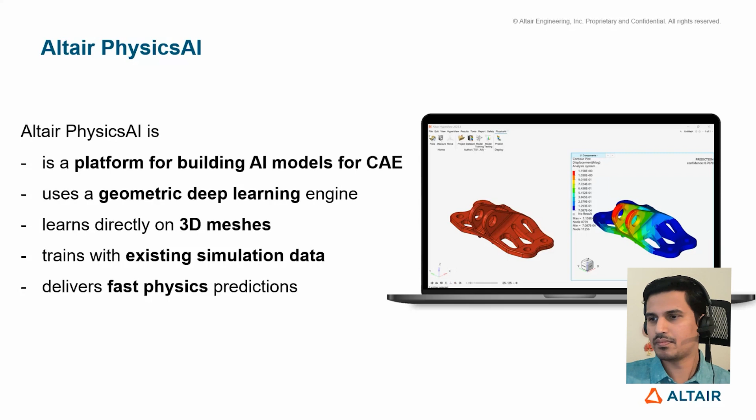So since we use deep learning, we can apply this method to different domains. We are not only restricted to structural CFD, but we can cover a wide variety of different applications, right from electromagnetics to aerospace, healthcare, and you name it.

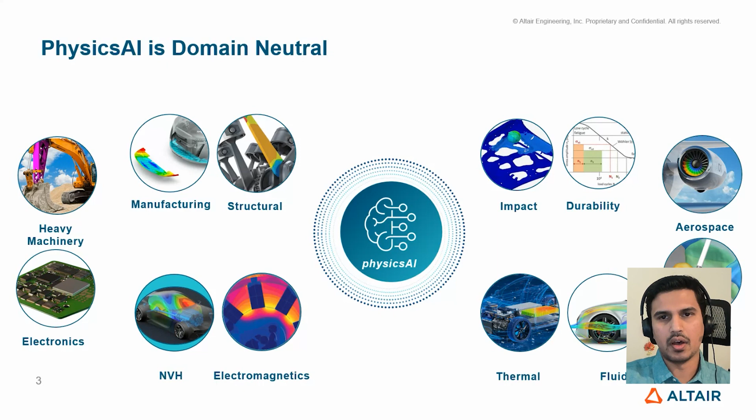So how does physics AI differ from traditional machine learning? Surrogate models, which usually are regression models, usually have a set of parameters, that means numbers going in, and we fit some sort of regression equation in there, and a KPI or a key performance indicator value, which could be a single number, comes out.

Now, if you look at the way this is constructed, these parameters need to be explicitly created, and because they are defined for a fixed set, there are a lot of restrictions in terms of the variety of inputs that it can adjust. For example, if there are additional parameters, you can't combine old data with the new data and create a combined regression model. You would have to rerun and create an entirely new surrogate model.

Also, the output that is coming out is usually a single value, or in some cases, a vector or a curve. Contrast that with physics AI. In physics AI, there's no need for explicit parameterization. For example, if you look at different geometries where the variation is very organic, you can't necessarily put parameters on them. But physics AI, with its geometric deep learning engine, is able to accommodate that variety, which traditional surrogate models can't.

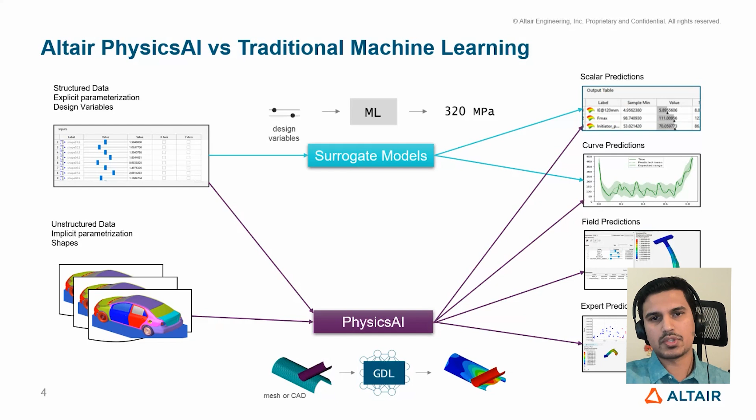And we can even train physics AI to predict some custom outputs, such as the failure modes, whether it's buckling or some other kind of deformation pattern. So really, physics AI can work with a larger subset of the input and output types.

So I spoke about the geometric deep learning engine, but what is it that Physics AI uses to process this variation? So in terms of geometry, we're looking at the coordinates for the points that form that geometry. We are looking at the connectivity, and we also have certain optional inputs such as part labels, which come in. For example, if you want to differentiate between different parts in a certain finite element model, you could have a bracket and a pin, and you could differentiate that, or maybe rigids and deforming geometry.

Additionally, to input certain parametric inputs, we have a method called custom inputs. Now, through this mechanism, we can put in features like thicknesses, materials, or it could be any other useful input, such as maybe an inlet velocity or an applied force.

And on the right hand side, this data is processed and spit out in the form of nodal or elemental results to create full 3D representations of fields. And we can even predict certain custom what we call vectors, and those basically represent the scalar values, the KPI and the curve values. So that's a brief introduction to Physics AI. Now let's see Physics AI in action.

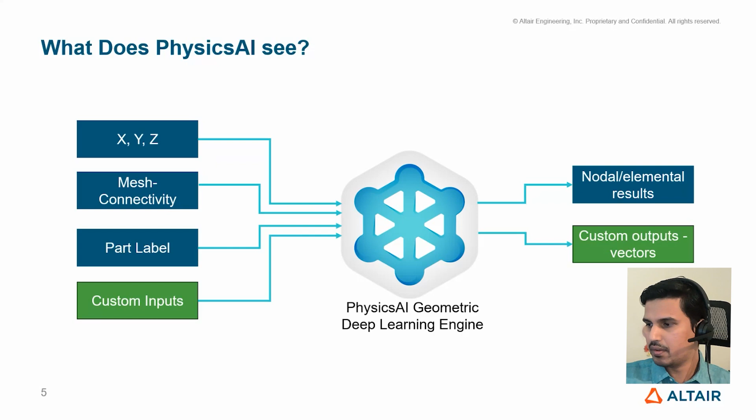So to demo that, I'm going to use HyperMesh, which is our pre and post processing utility, and also our model visualization tool. Physics AI is embedded inside of HyperMesh, and I'll talk about how well these two technologies complement each other to create an integrated tool. So let's say a designer has created a new design, and they have created a CAD model. So I'm going to drag and drop that CAD model in here.

All right. So if you look at how a traditional workflow proceeds, the designer creates a CAD model and then hands it over to the CAE team. Now the CAE team has sort of a manual and labor-intensive task of taking this model, meshing it up, applying boundary conditions, loads, and then solving it either using a CFD solver, because in this case we are going to evaluate the drag coefficient, or if it's a structural problem, then a finite element solver.

But because these models are huge, we are talking about hours or days of processing time before we can actually evaluate this design. And obviously, there's not going to be a single design evaluation. So you can imagine how the required time adds up. Now, with Physics AI, we can enable an alternative workflow.

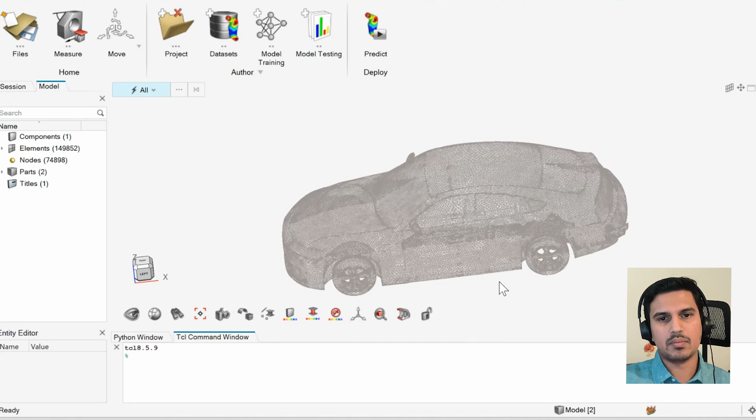So that model doesn't even have to be located on the designer's PC. It could very well be on the cloud. So let me show you how that would work. For example, in this case, this is Altair One, which is our cloud platform for sharing files and deploying Altair applications. As you can see, there is a folder here called Physics AI Models, inside which pre-trained Physics AI models have been uploaded. So think of it as a CAE team uploading them to the cloud and then sharing it with the designer.

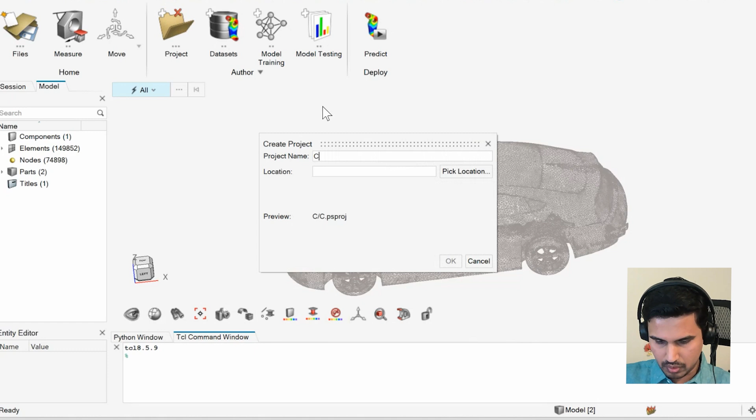So in order for me to make a prediction, I need to first create a project. So let me go ahead. And by the way, this is what we call the Physics AI ribbon. I'll talk more about it, but for now, let me just walk you through the demo. So I'm going to call it car prediction. And then I need to specify a location where this should be saved. So I'm going to select this folder and hit OK. Okay, you can see that the project name is reflected right next to the author.

Now, I'm going to import that model, which is available on the cloud. So I'm going to model training and then importing a model. And right here, you'll see the integration with Altair One. So I'm going to click on that and hit fetch. So we have two-factor authentication, so bear with me for 30 seconds while this loads up. Okay, so now you can see the list of all the models that are shared with me or available to me on the cloud.

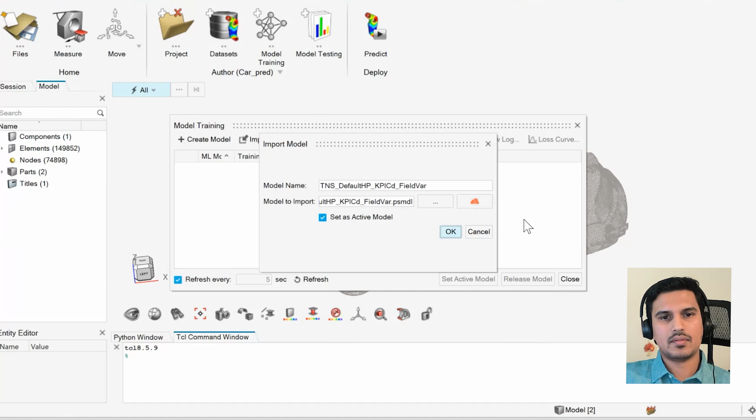I'm going to select the last one and just set it as active. So that model will be downloaded and we will activate it. Okay, it has been set to active. And I have the CAD model, I have the project, and I have the Physics AI pre-trained model loaded. All that remains to be done is now to hit predict.

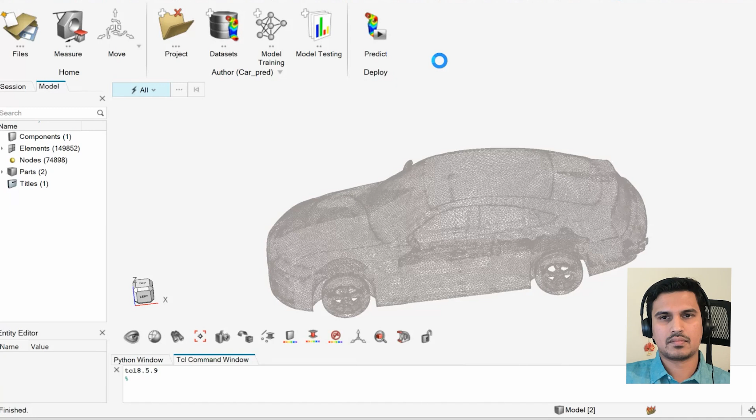So in less than a minute, we have an evaluation for a complex model, and we have both a scalar response and a field prediction. So in this case, the wall shear stress on the car body, and then the average coefficient of drag for

the vehicle. So you can imagine how much time savings now are achieved for the organization as a whole, because the manual tasks on part of the CAE team are reduced, and they can investigate their other methods. Maybe it saves them some time.

And from a designer's perspective, they can evaluate a lot more designs. They can come in and make minor geometric modifications to the car, for example, increase the width, increase the height, and use the same model again and again, and very quickly evaluate multiple variants of this design.

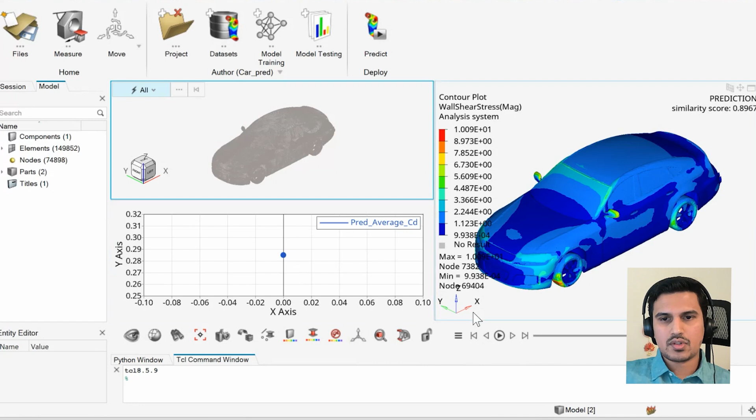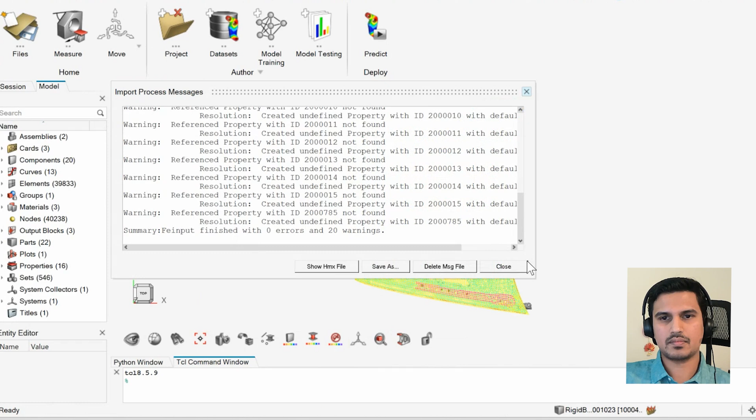So let me show you another example, this time for a transient use case. So for that, I'm going to use a hood impact case. So let me drag and drop it in here. Okay. This is a Radioss deck. So this time I'm going to work with the mesh. Okay, as you can see, this is the front hood and there is an impactor.

Now I'm going to repeat the same procedure. So going to project and let's call it hood impact demo. And I need to save this project, so I'm going to save it here. Now, going to model training and retrieving an appropriate model from Altair One.

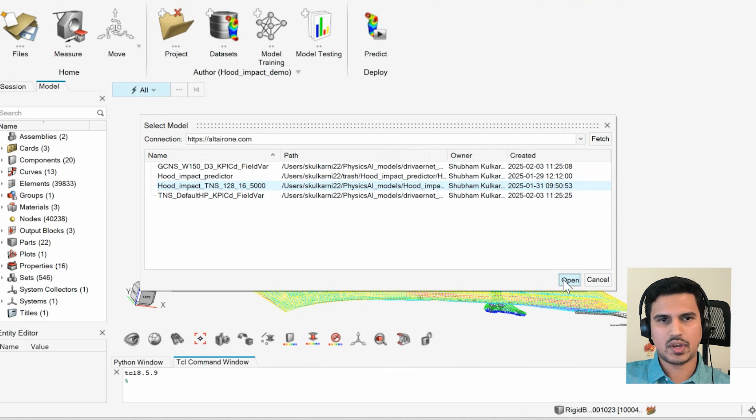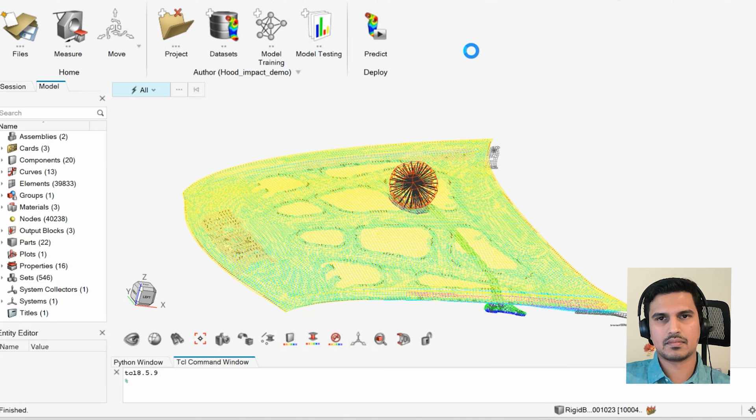So this time I'm going to select a different model, set it as active. Go. And now I'm going to hit predict. So within a few seconds, we should see a transient prediction for the deformation.

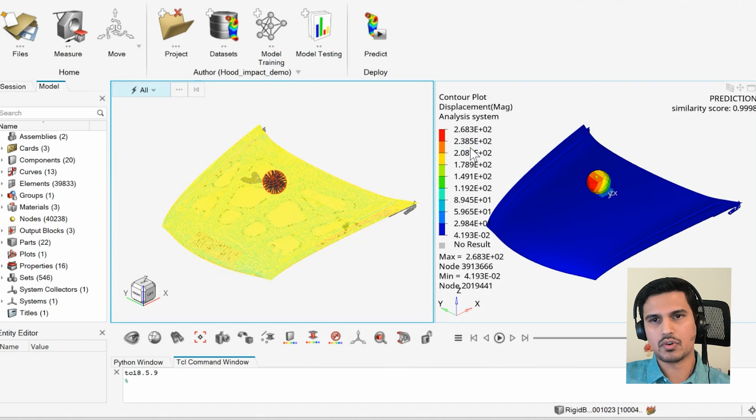And let me turn on the transient simulation. I'm going to turn on the deformation here. And let's reduce the speed a little. And here you can see that for a completely new design, it is able to predict the deformation pattern because of this impactor landing on the hood and then bouncing back.

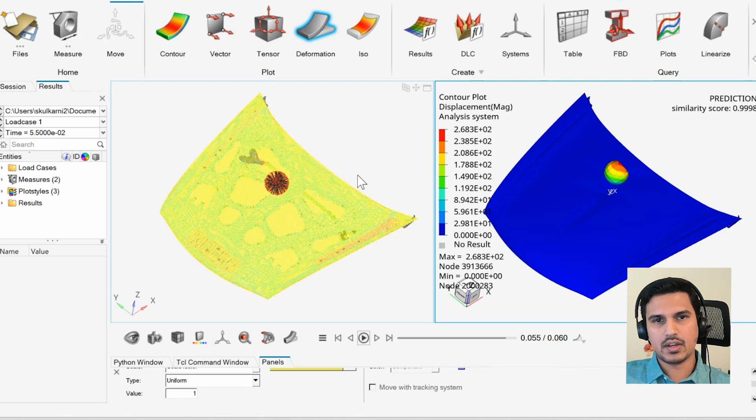Now, let's say I want to evaluate a couple of different variants of this impact case. So maybe the impactor is moved a little bit, and I want to see what the deformation looks like for that case. So that is very easily done by interacting with this.

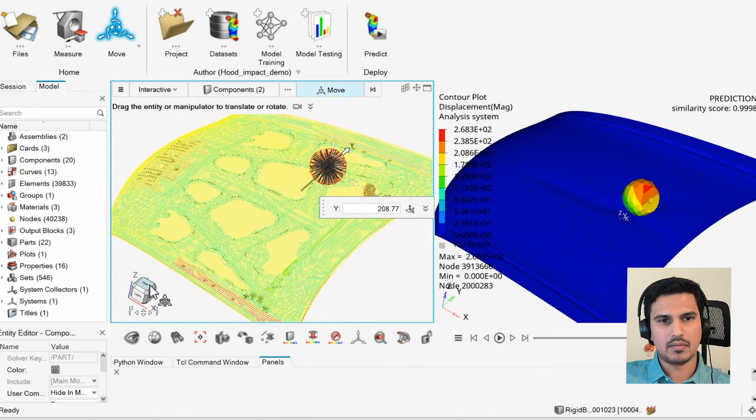So let me first use this move tool in here and select the impactor. And then I'm going to click on move. So move a little bit in the X direction and then a little bit in the Y direction. And let me switch to the top view to show you the difference. And now I'm going to hit predict.

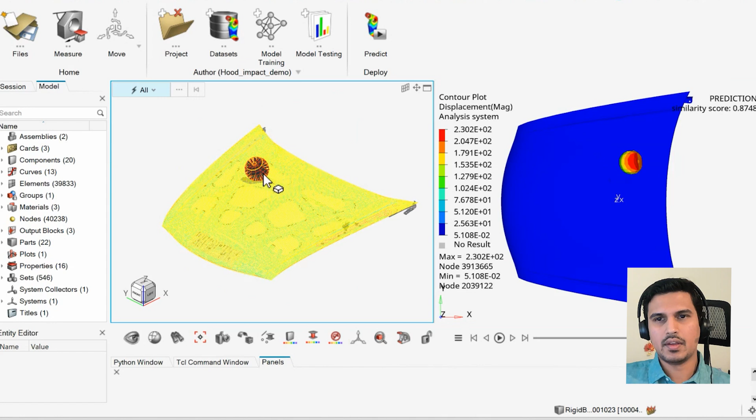And you can see that the impactor location has been updated and the changed deformation pattern is now reflected in the prediction. So, orders of magnitude faster, and the predictions are very good. We do have a metric here, which is a similarity score that indicates how novel this design is to the training data, and that can be correlated to the accuracy or the trust that you can have with the prediction.

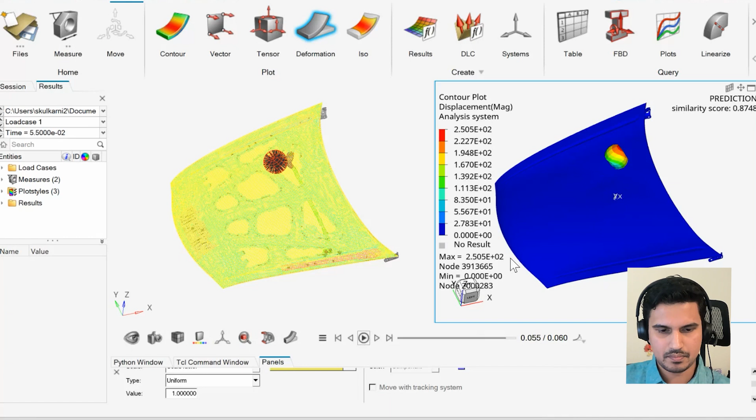So I showed you how the physics AI models can be deployed. Now let me walk you through the process of creating these physics AI models. So let me create a new session here. Right. So I spoke about how PhysicsAI is to enable the creation of AI models without having to be an expert at data science.

And to do that, the tool has been constructed in such a way that if you look at the icons in this ribbon, it's kind of a self-guided tour of where you start, what are the steps you need to follow to create a certain physics AI model, and then validate it. And then once you're happy with its performance, then you can go and predict with it or maybe share it with the designer. So let's start with one step at a time.

Let me first show you the starting point, which is the past, existing simulation data, either from past studies or maybe if there isn't sufficient data, then you can always run a design of experiments. So in this case, I have all my files saved in a folder called iBeam dataset.

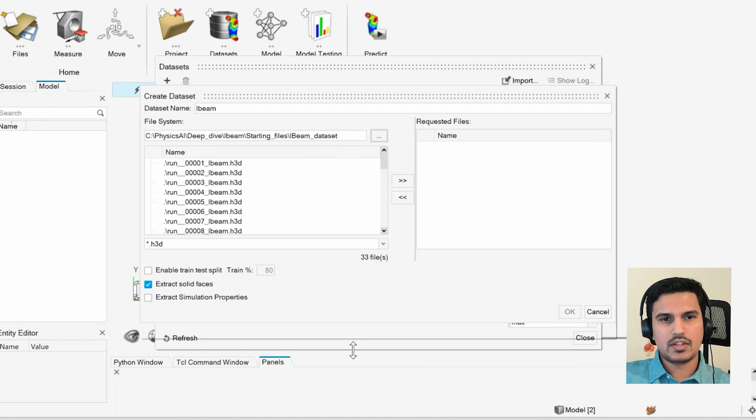So I'm going to call it IBeam, and it's asking me for the directory where the data is stored. So it's an IBeam data set. Now inside this folder, I have filtered out all the H3D files. Let me go ahead and select all of them for now, and I'm going to add them in the dataset creation tool. There are some check boxes at the bottom, but I'll cover them later on.

Let me first go ahead and just create a brute force data set.

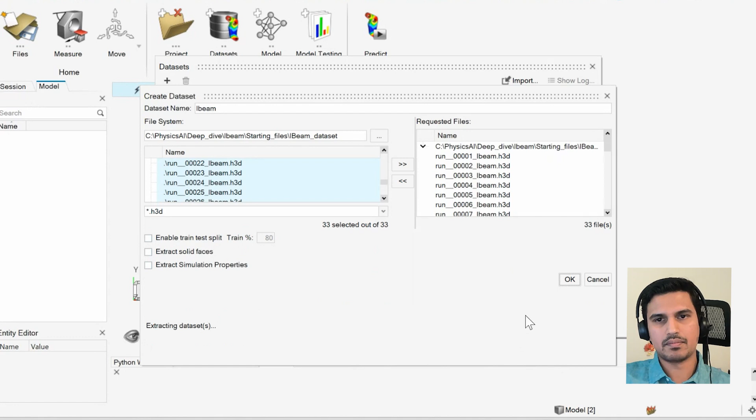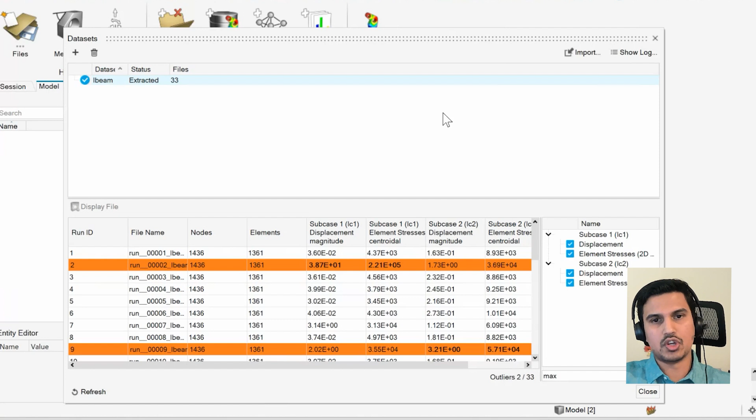So you can see that rows 2 and 9 are highlighted in red because this had been flagged as outliers, maybe because the KPI value is not matching. For example, for row 2, you can see the subcase 1 max displacement value is orders of magnitude higher than the rest of the points. Same for row 9, and that's also the case for subcase 2 element stresses. So when we create data sets, we want to make sure that there aren't any outliers that introduce noise or skew the performance such that PhysicsAI is not able to make accurate predictions for the general design space it's supposed to perform in.

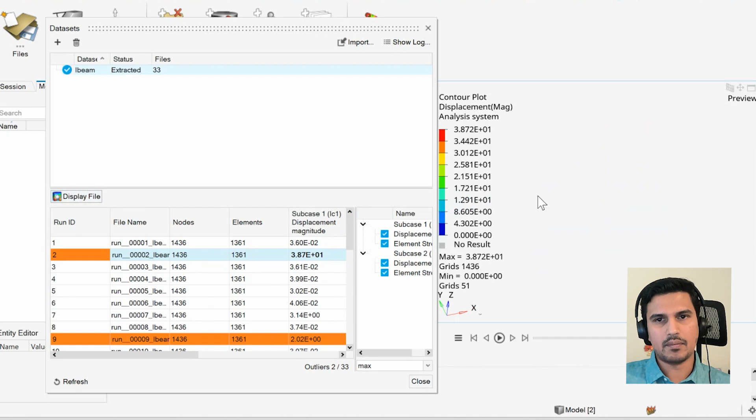And because this is in Hypermesh, and it's a preprocessor and a model visualization tool, very quickly I can actually take a look and see why is this an outlier. For example, I selected row 2 and I clicked on display file, and now I can see that it's like a curved ribbon, whereas if I look at row 1, for example, it's an I-beam. So maybe the dimensions for row 2 are so far off that it's not a useful data point, so that's something that needs to be eliminated.

And because there's this information available here, I could even manually scan this and flag more outliers than what PhysicsAI suggests. For example, I think row 7 is also an outlier because the displacement magnitude is a couple of orders of magnitude higher than the rest of the data set.

Okay, so the next step is going to be refining this data set or curating it to remove all the outliers. So I'm going to create a new data set called IBeam curated, and again point to the same files. I'm going to add all of them again just because it's easy to add 33 points and then remove the ones I don't want.

So 2, 7, and 9 have been removed. You can see that the selected files are down to 30. Now let me come down to these check boxes at the bottom. So the first one is enable train test split.

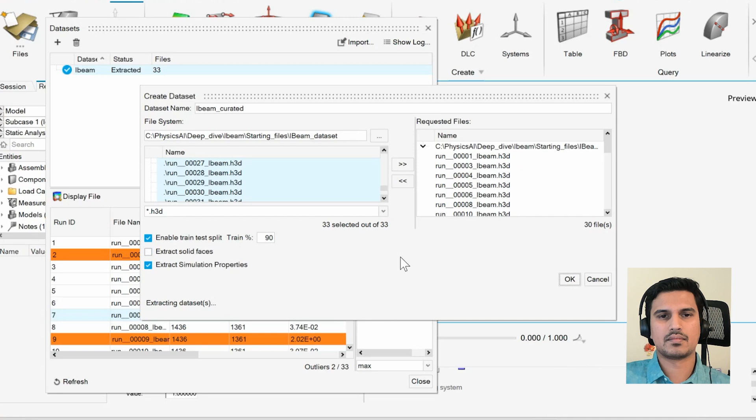Should be done in about 30 seconds more.

Here we go. So two more data sets now appear in the top table: the Ibeam curated test with 3 files, and Ibeam curated train with 27 files. And now if I look into these, there are no outliers, so that's how I know that these are good data sets to use.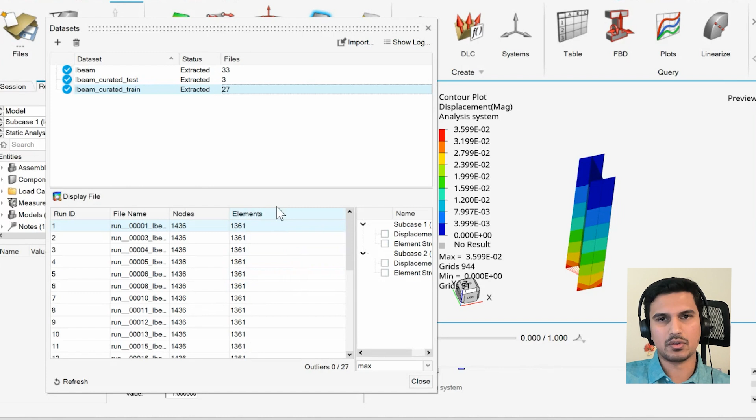Coming back to our ribbon, so we completed the second step, which is dataset creation. Now I go on to the third step, which is model training. Again, there's no models because this is a completely new project. I'm going to click on create model.

So the first field that I need to enter is a model name. You're going to have multiple models, so it's better to give it a very descriptive name. I'm going to call this displacement and IY, which is the moment of inertia along the y-axis, and maybe add some hyperparameter values. We'll see what those are. So let's say I'm going to call it disp IY 50.

Then the next field here is a drop-down menu from which I can select the data set that should be used during training. So obviously I want to use I-beam curated train.

Now it shows me a list of all the available inputs for this file. Coordinates is the default one; that's how the geometric deep learning engine can actually process the geometry, so that should be checked. And the only other variable is the shell thickness. Now there are two more inputs that I could check, but if a variable isn't really a variable, if those values aren't changing across the samples, there's no point supplying it. So I know that materials are not changing across the samples, that's why I've not checked it.

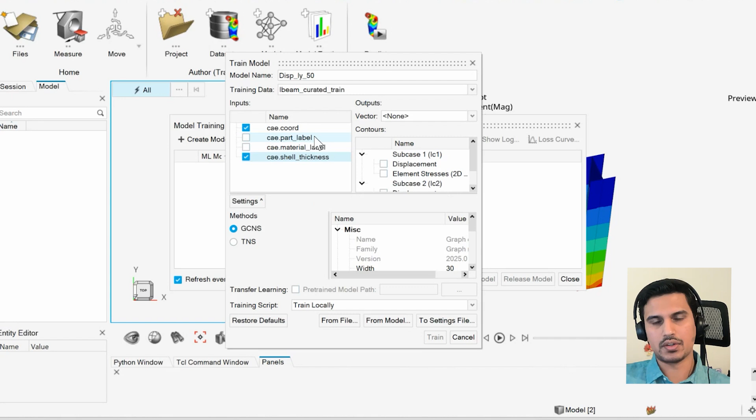On the right hand side, you can see outputs. There are two types of outputs: one is vector, which is the KPI, the curve value, curves, etc. You can see that the data available for this data set in particular has a few KPIs, but I'm interested in the moment of inertia along the y-axis, so I select IY.

The second type of output is a contour or a full field response. So I'm going to select displacement, but I'm free to select as many responses as I like. Of course, keep in mind that the more responses I ask it to predict, I'm asking physics AI to juggle or trade off the accuracy. So it's better to not select too many, but a few is fine.

Then you have to select the architecture. Physics AI currently has two architectures: the first one is graph context neural simulator, and the other one is transformer neural simulator. I won't get into the details because that'll get into a very big topic. For simplicity, let me select the first one, which is the GCNS. Now, based upon which architecture you select, the hyperparameter values or the tuning settings are displayed.

So for example, for GCNs, you can see that there is width, depth, batch size, and epochs. So these are essentially controlling the settings that should be used during training, and how the fitting should be done, etc.

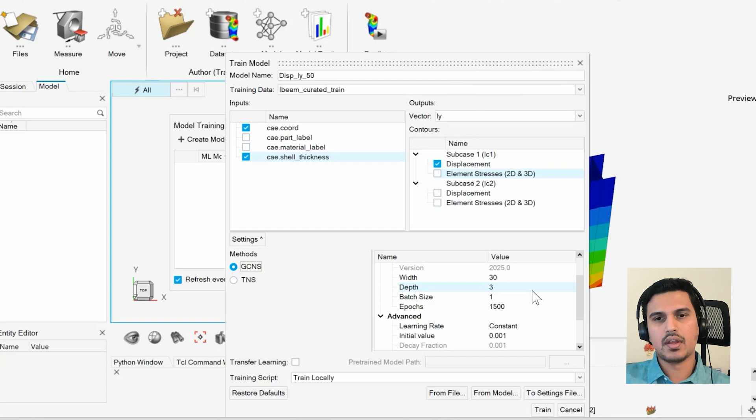The default parameters are more than sufficient for this simple problem that I'm demoing. But if there are more complex problems, the user can easily come in here and edit them for their preference. I want to show a quick demo, so I'm going to reduce the number of epochs to 50. By doing that, I know the model is going to be kind of a bad model. It's not very well fit, but I just want to show how it works. So let's set it to 50.

Then we move down here and you'll see a checkbox for transfer learning. This is a very useful feature. For example, let's say you have created multiple physics AI models and you have a new design come in, but you don't want to start from scratch. You can say, I have these physics AI models lying around and there's useful information contained within them. I want to retrieve some of that information or use it as a starting point. That can be done through this transfer learning feature. You have to check this and then point to the pre-trained model. We'll not do that in this demo, but that feature is in there, so you're not wasting away your past models. You can still reuse them.

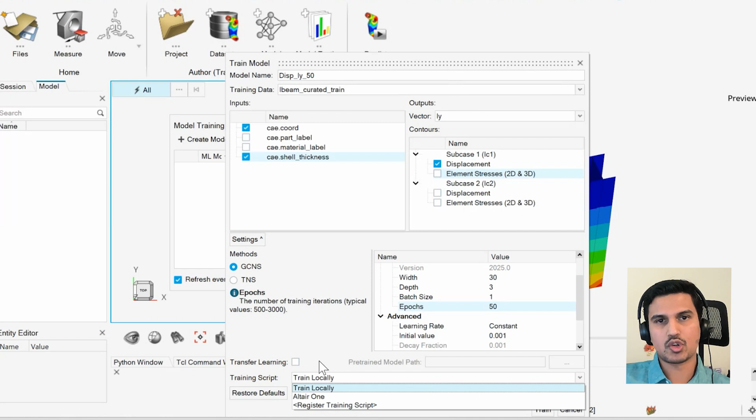The last option here is to specify where you want to run the training. You can run it locally, and it helps a lot if you have a GPU. We've seen a speedup of more than, I feel like, more than a factor of 10 with GPUs. And it doesn't have to be a high-end GPU. Most laptops have very good GPUs, and that should be sufficient for most physics AI cases. But there's also an option to submit this training to Altair One or to the user-specific HPC platform. So I'm going to stick with local and hit train.

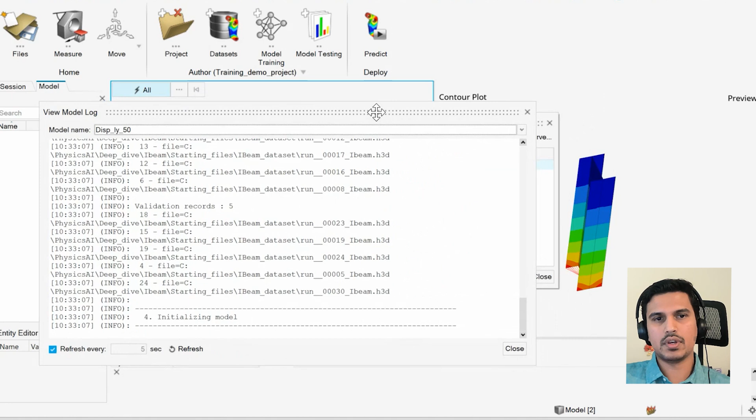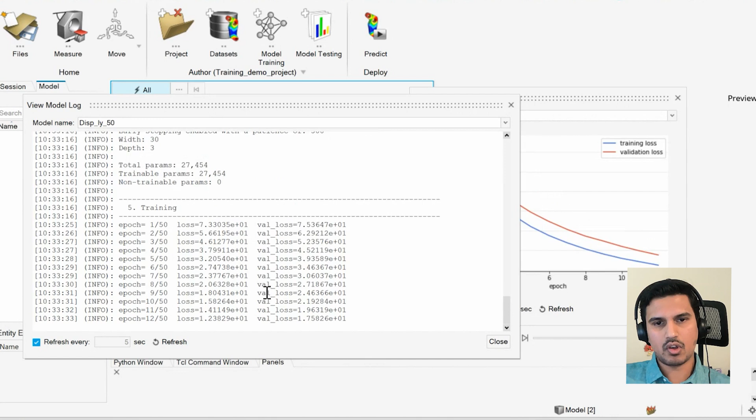So you can see that the model training was processing and now it's running. And if I want to keep track of what's happening, I have two utilities. The first one is a text log and the other one is a loss curve. Inside the text log, you'll see a summary of all the files that were used, the architecture that was used, the hyperparameters, the values specified during training. And once the training starts, you can actually see the mean square error loss value, and you can track how well the model is performing.

Notice that there are two curves in here, the training loss and validation loss. So in order to avoid overfitting, we have actually reserved some of the training files to keep track of how generic the model is, or to avoid overfitting. I have a GPU on my laptop, and you can see that in less than a minute, I was able to run 50 epochs for this model.

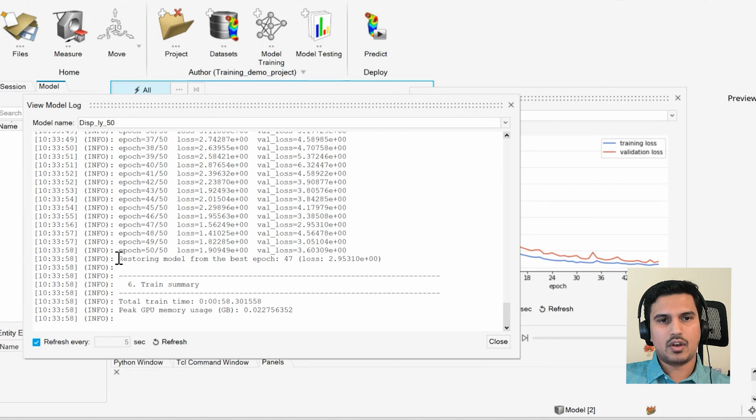All right, and if you look at the log, it also summarizes the best epoch. So Physics AI remembers the best configuration or the best training round of epoch. So you could run it for a really long time if you're not sure how long to run it, and then Physics AI will automatically cut back to the best epoch it encountered during training.

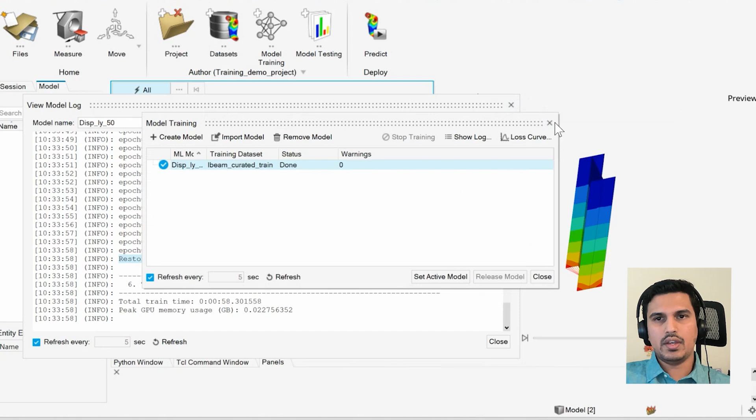All right, so the model is trained now, but I need to make sure that the model is actually a very good model before I can hand it over for field deployment. So the penultimate step is model testing.

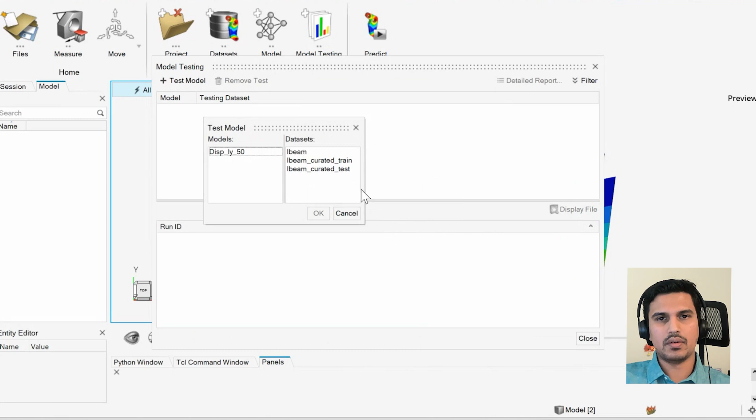And right now there's no test scenario, but I can create one by clicking on the test model button, and it shows me a list of the available models. Right now there's only one, and then the data set that should be used for testing. So let me select Ibeam curated test, because this is the data which is unseen during training.

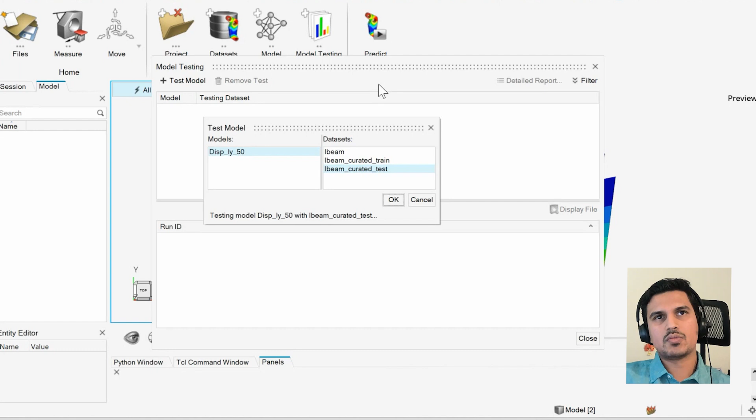Okay. So the testing for each of these models is going on. Now, the difference between testing and prediction is that in testing, you have a true value to compare to. So each of the points in the test data set has an FE result. And that's how I can compare how well my predictions are vis-a-vis the FE result.

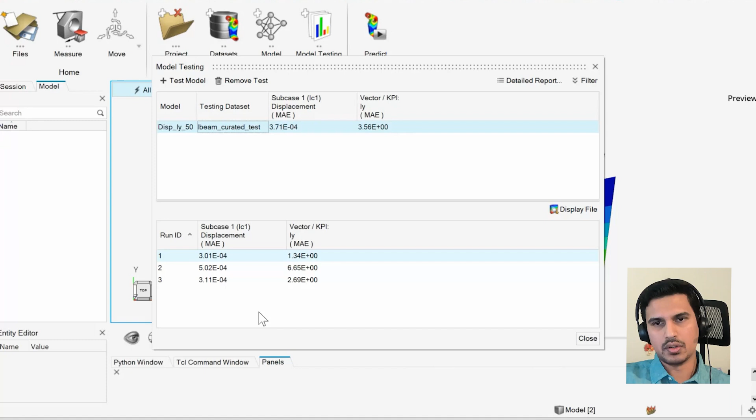It could be that one of the error values is okay, but the other one's too high, and that value needs to be relative to the scale of the results. So there needs to be a detailed inspection of these results. The other factor is we also need to look at the distribution. So we can do that by selecting a data point, let's select the first one, and clicking the display file button. And that will show us Physics AI predicted versus FE true results.

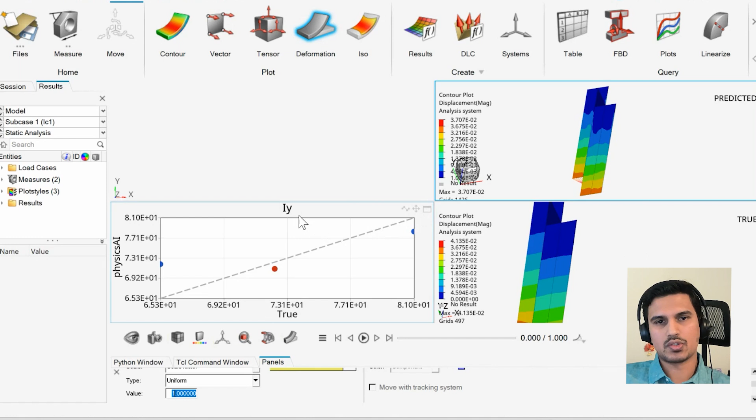So you can see that the predicted results are not too shabby, but they're not good enough, right? Clearly, and this is what we expected. The model is a very quickly trained model. It's not going to be very accurate. And the field results, true versus predicted, are shown on the right hand side. But for the scalar, which in this case was the IY value, the moment of inertia value,

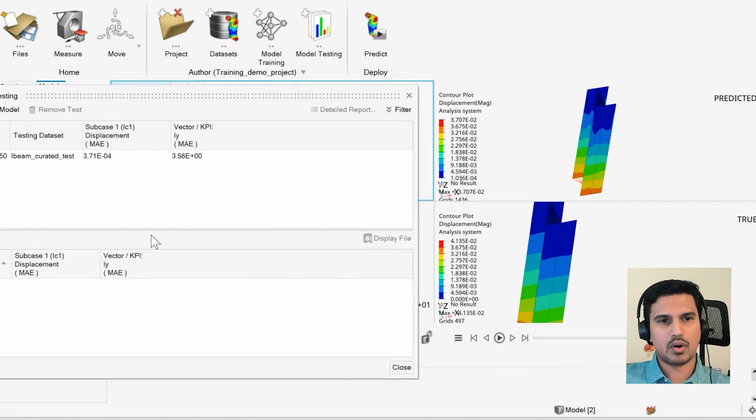that's plotted on a graph with the true value on the x-axis and the Physics AI prediction on the y-axis. So if the prediction was perfect, the point would have been along the 45-degree diagonal. So point one looks okay, but you can see that two and three are kind of far off. And if I switch to run ID 2, the results may be a bit different. So that's why it's important to look at this in a detailed manner and not just rush looking at this one value.

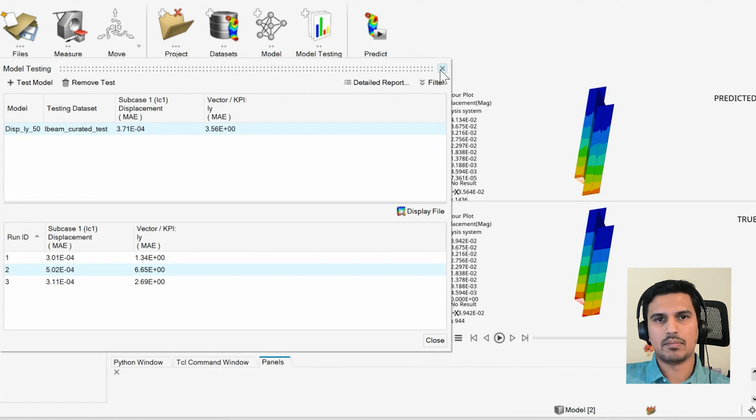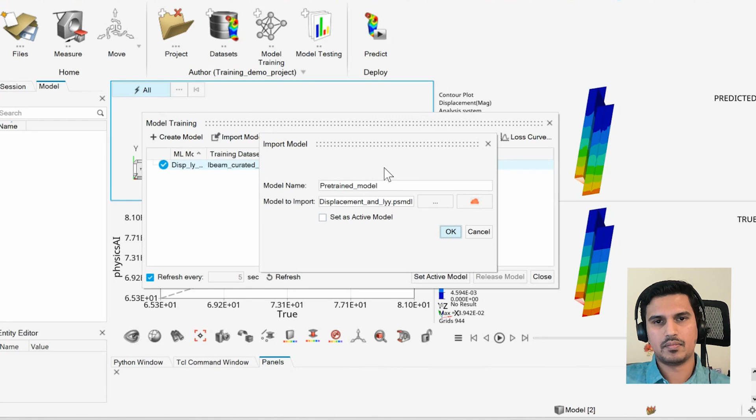So let me take a snapshot of this because I am going to contrast it with a well-performing model. So let me go back to model training and import a model I had trained before. The file format for a Physics AI model is .psmdl, and I'm going to give it a name of pre-trained model, and let's import it. Okay. Now to make an apples to apples comparison, I need to test this new model against the same data set.

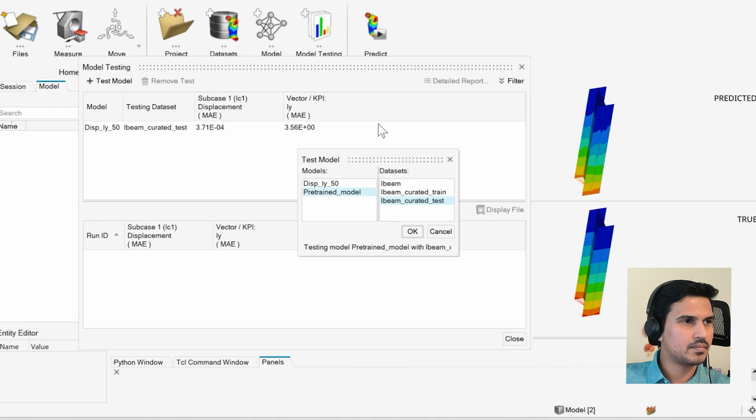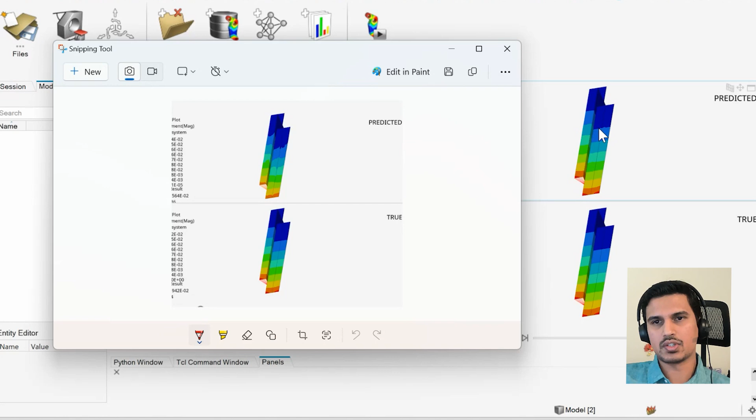Okay. Now look at the MAE numbers. Clearly, these are an order of magnitude lower than the previous model. So just looking at these numbers, I can preliminarily say that this is going to be a better model. But let's not stop at that. Let's also look at how the predictions look. And now if I compare, clearly you can see that the first model had very jagged predictions, whereas the second one is much smoother. Right? So that's how I know that model 2 is a better model to use than model 1.

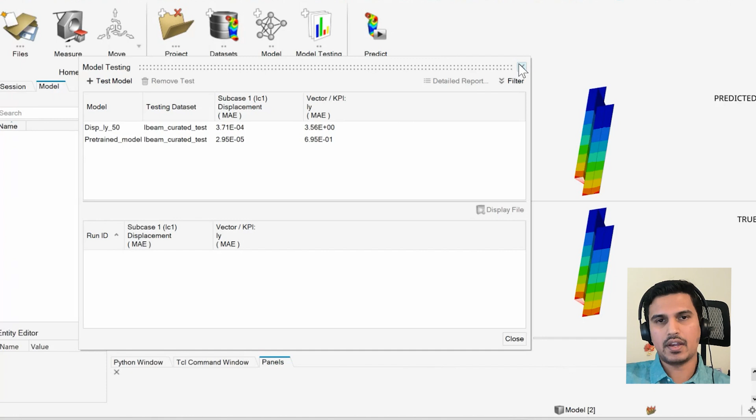And as a user proceeds with their training, they will see that certain models are not doing very well. So they can do some hyperparameter tuning, they can adjust their data, and then keep comparing with the same benchmark. And finally, when they're satisfied with the performance of the model, we move on to the last step, which is prediction. And that brings me back to the beginning of this demo, where we saw that we can just load in new designs and use our pre-trained models to make predictions very quickly.

So that brings me to the end of this physics AI demo.

Shubham, thank you so much. It was really, really cool to see that. One of my most favorite deep dive sessions for sure. I've seen there was also a lot of interaction. I'm not sure if you've seen it on the site, but in the comments people asked a ton of questions, and luckily Fatma and Eamon were taking care of the answers. So thank you for that.

A couple of questions I have: what makes the geometric deep learning models uniquely suited for simulation tasks compared to the traditional approach of ML models? Right. So it's a very good question. If you look at the amount of variation that the geometric deep learning engine can handle, it's orders of magnitude higher than what the traditional regression models can handle. For example, most of these parametric studies have restrictions: the mesh has to be the same, the parameters cannot change. You can't have one data set with 3 parameters, another one with 4. You can't combine them. Whereas with physics AI, you can actually do that.

The other thing is with regards to the types of outputs that we can produce. You saw that we could produce full 3D predictions, and not just static 3D predictions, but also a nonlinear or transient simulation where you see parts deforming, and then maybe there's some elastic recovery and so on. So that's something which traditional surrogate models cannot handle.